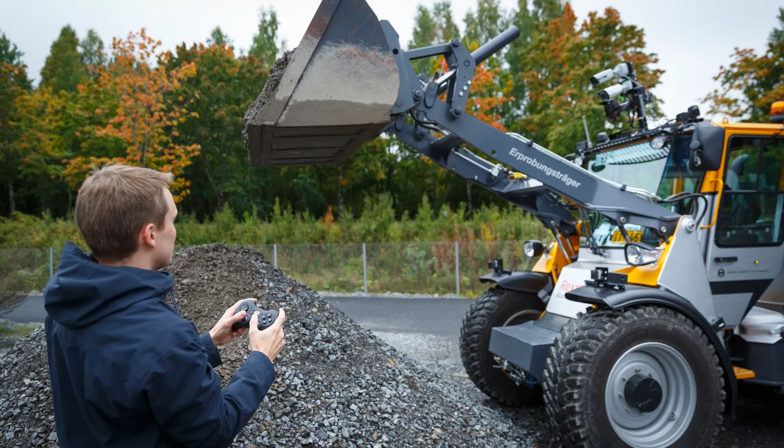Is that on? Now, yes.

Okay. I'm researcher number 2 in the MORE project. I joined the MORE project in March 2021 and I worked at Karlsruhe Institute of Technology under the supervision of Professor Markus Geimer for 6 months, and after that I moved to Finland to work in Novatron company with Antti. And now I'm currently working in Liebherr company in Austria.

For today I prepared a brief presentation. The topic is work performance evaluation of mobile machines. There are several research questions that we would like to answer. Why does the productivity matter so much? Who can get benefit from the productivity? What is the productivity? There is an important sentence: if you cannot measure something, you cannot improve it. This is so necessary for the improvement of the technology in that field.

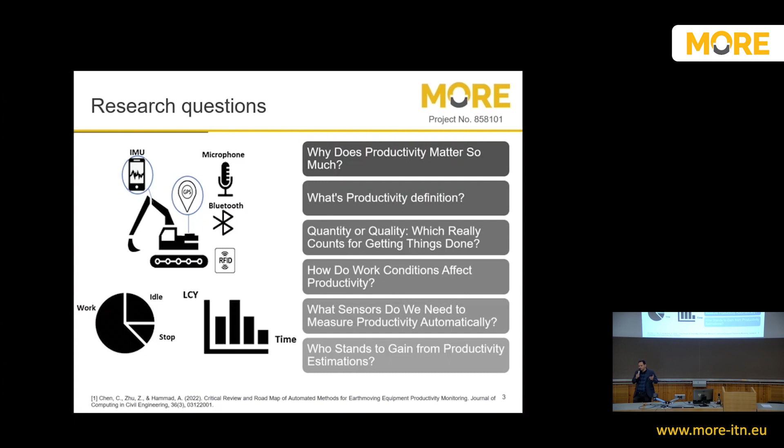And what operating condition can affect the productivity: the swing angle, digging depth, the weather condition, skill of the human operator; all of these parameters can affect the productivity of the machine. By which sensor can we calculate the productivity? Vision sensors such as LiDAR, or maybe motion sensors using inertial measurement units or GNSS. And who can get a benefit from the productivity? A manager or a contractor, or maybe the operator inside the machine.

But for trenching and grading, this definition does not work anymore. When the managers talk about the trenching operation, they say the linear length of the trench per time, or for grading it is the graded area per time. And in this operation, the accuracy or quality of the task is important. So, because of that, we developed a method for automatic task recognition. Firstly, we want to find out what is the current task of the machine.

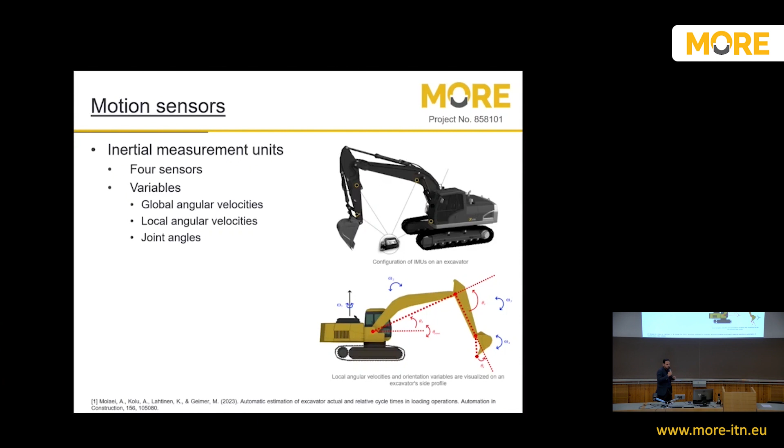The next step is the data collection. We did a lot of experiments to collect enough data in different weather conditions during 1.5 years using our machine in Novatron, a Komatsu excavator. The swing angle in the operation was between 60 and 120 degrees. We used different types of material, sand and gravel, and 2 operators did the operation: me as an inexperienced operator, and one of our colleagues in Novatron as a very, very experienced operator.

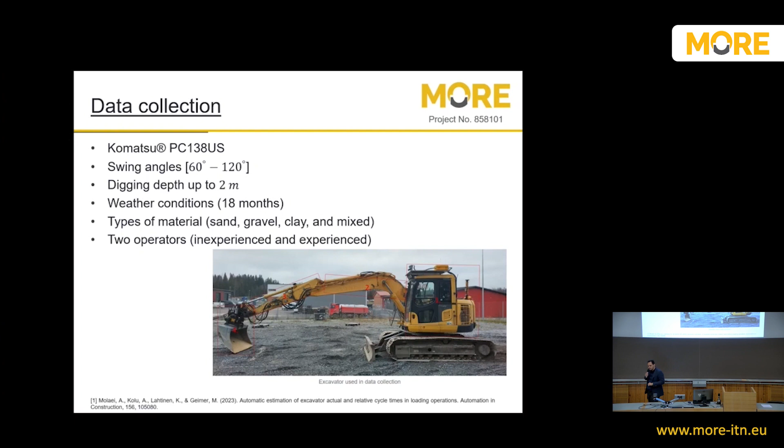The next step is the data processing. We decided to identify the task of the machine based on the time window. We implemented different sizes for the time window, 10 to 20 seconds, and the overlap between two consecutive time windows can be between 0 and 75%. For the data annotation or ground truth, we used another camera installed on the machine, and the most frequent label in each window is chosen as the label of that window. We have 4 different labels for the task: loading, trenching, grading, and idling.

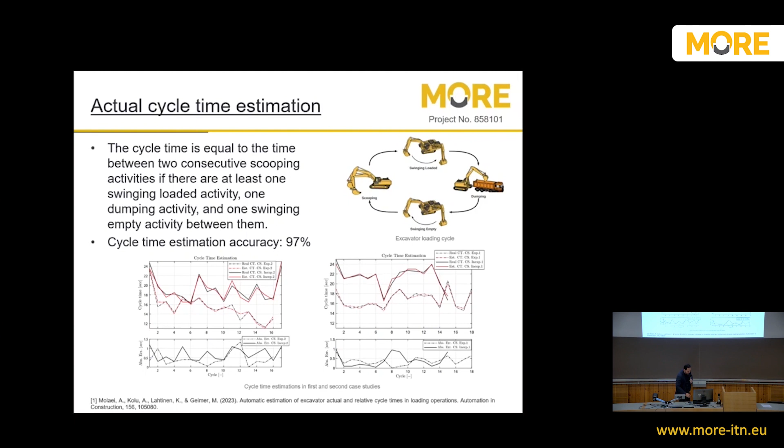Now you can see the result of our method. We can achieve an accuracy of 97% for the cycle time estimation. The error between the ground truth and our estimation is less than 1.5 seconds for the cycle time of the excavator in the loading operation. But this part,

For the theoretical productivity estimation, we need to know what is the current condition in the work site. For this operation, what is the swing angle, what is the digging depth, or maybe what is the material that the excavator is working on, or maybe the size of the excavator. We developed two methods for the swing angle and digging depth estimation. The previous method we presented in the previous events,

but now we are trying to estimate the swing angle using the subtask identification. Actually, the swing angle is the absolute deviation between the scooping and dumping position. How can we calculate the scooping and dumping position by using the subtask identification? Actually, the scooping position is the average of the cabin encoder measurement in the scooping subtask, and for the dumping it is the same. By using the absolute deviation of the scooping and dumping position, we can calculate the swing angle.

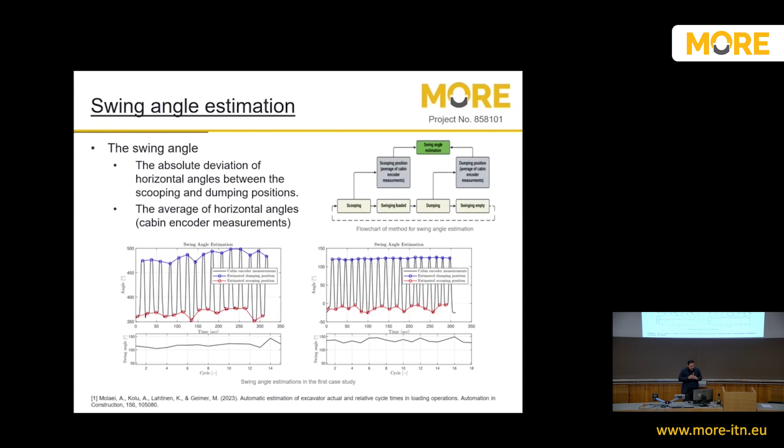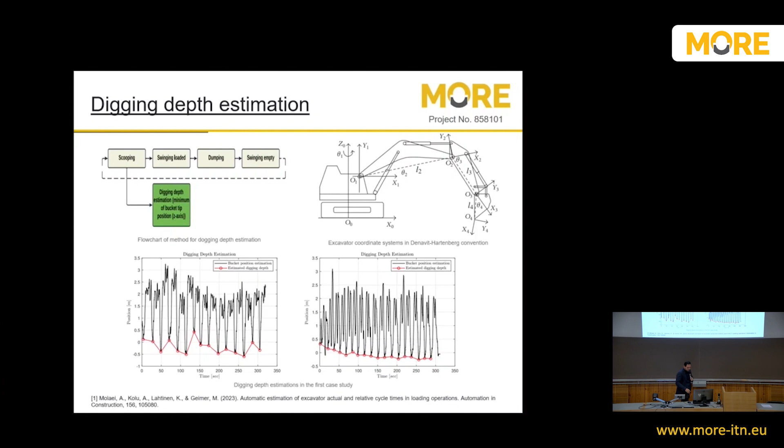Okay, here we are trying to estimate what is the theoretical productivity or theoretical cycle time of the machine. We did some research, and there are some limited methods for the theoretical productivity of the machine from some big companies such as Komatsu and Caterpillar. And we cannot use the model from Caterpillar because it's a descriptive model and it needs human decision. But we implemented the Komatsu and BML method in an automatic manner.

The BML guideline is a German handbook that tries to provide some models for the theoretical productivity of this kind of machine. And our results show the Komatsu model is more optimistic, but the BML guideline is more realistic, and we decided to use the BML guideline. We need 4 inputs for this model: the swing angle that we estimated, the digging depth we estimated, and also the bucket capacity, which we can suppose we know.

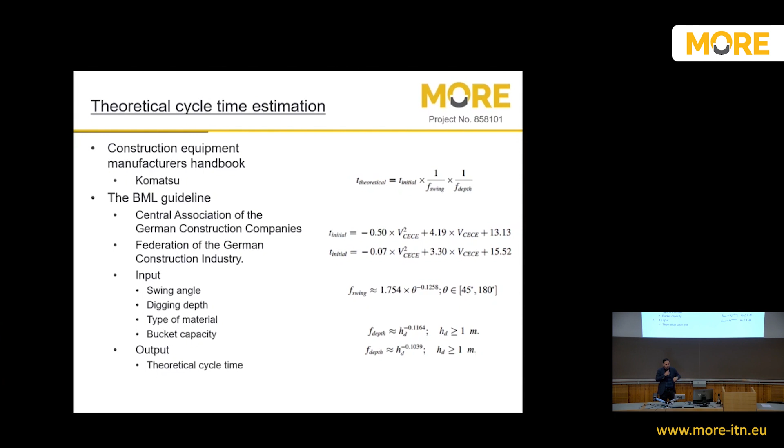But for the type of the material, for this research we suppose we already know it, but maybe in the future we can run some algorithm for automatic material classification, because the type of the material plays an important role in the productivity of the machine. By using this mathematical formula, we can estimate the cycle time of the machine.

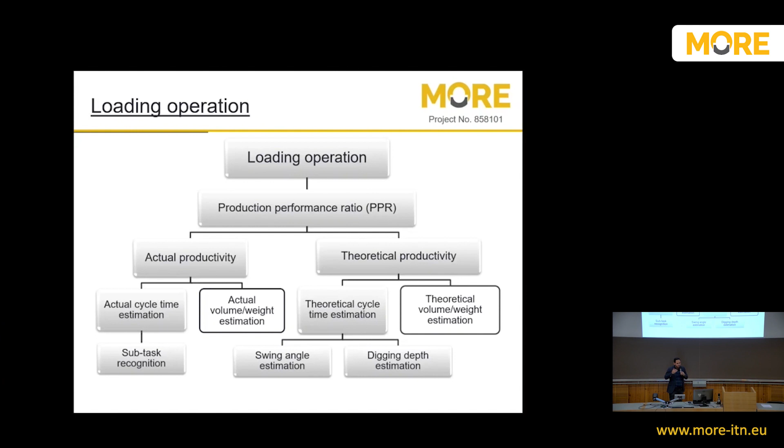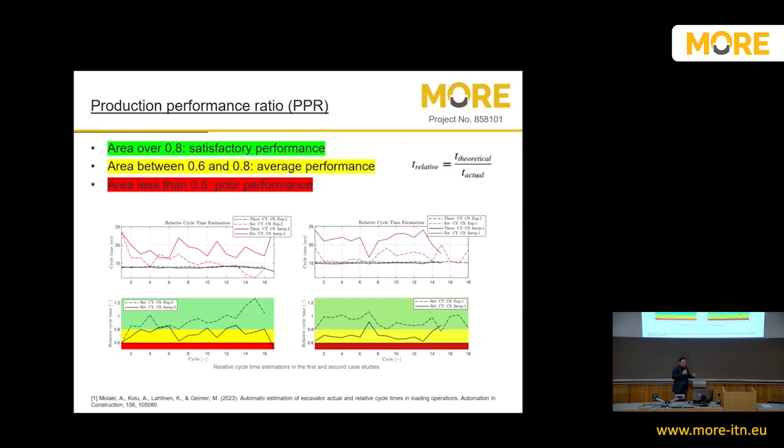That was our idea for the productivity estimation of the excavator in the loading operation. But definitely this definition doesn't work anymore for the other tasks. For the trenching operation, we tried to implement a similar structure. There are some problems, but I think finally we can implement this algorithm.

For the actual productivity, we want to calculate the length of the trench per time. But who provides for us the desired model, or how can we see the surrounding of the excavator to check what is the productivity, or how can we compare the desired model with the actual terrain in the work site?

To see what is the current condition of the work site, we need a 3D vision sensor. In Novatron, we implement the algorithm by using the LiDAR sensor on top of the machine and IMUs and GNSS to develop a grid-based height map, 2.5D map, to model the working area of the excavator in the surrounding area. I don't want to talk in detail about this algorithm, but we have some challenges for the transformation of the data from sensor frame to the machine frame, and after that machine frame to the global frame.

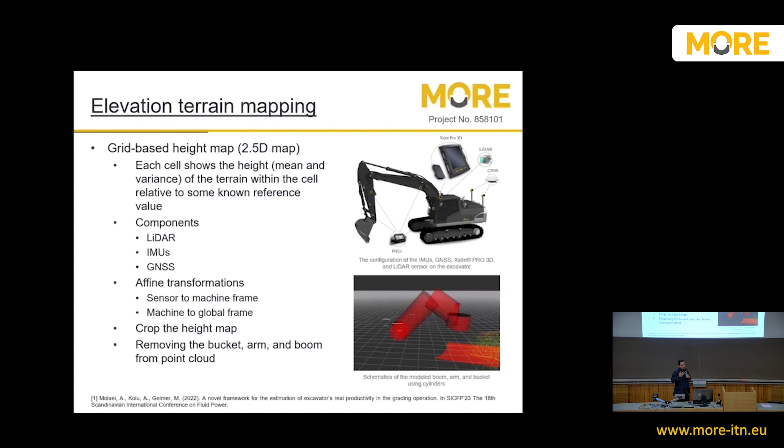And also because the LiDAR sensor is on top of the machine, we always have some extra points from the movement of the manipulator of the machine. We estimate the position of the manipulator of the machine, and we try to remove those points from the point clouds. This step provides what is actually happening in the work site.

But about the desired model, Antti talks a lot about BIM, or building information modeling. This model can give us a lot of information about the target model in the work site. In Novatron, we installed the Xsite PRO 3D system in the cabin of the machine. By using this hardware, the operator can always compare the bucket tip position to the target model and do the operation.

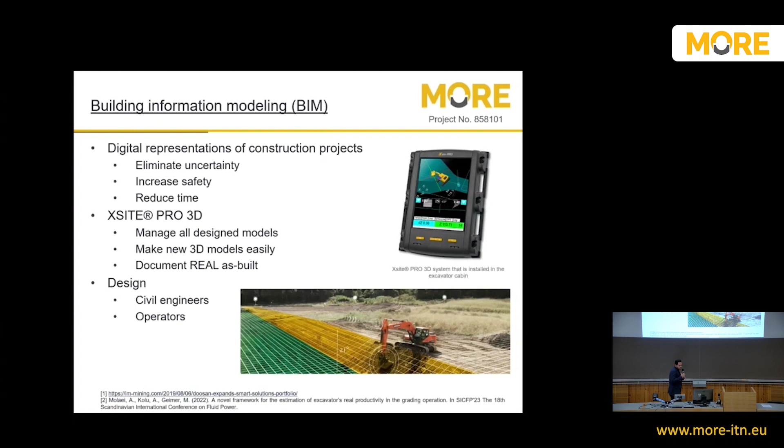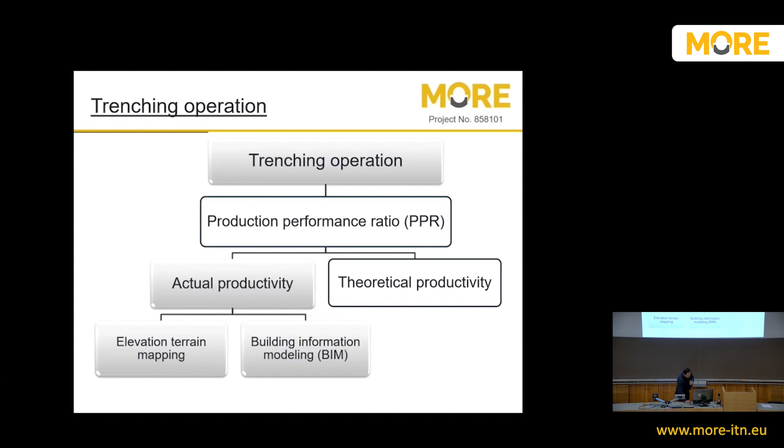How much time? Okay. I will handle it. Okay.

Now we can calculate the productivity estimation. What was the definition? Linear length of the trench per time. We consider a region of interest. Actually, it is a narrow stripe of the trench. And we can always compare the elevation of this stripe to the desired model. When the error, the difference between the target and the actual one, is reduced to a value less than the required accuracy, it means positive productivity.

But sometimes some materials fall into the trench, or the operator is not good at the operation and goes too deep; it means negative productivity. And as you can see, the result of the method here is the aggregate productivity.

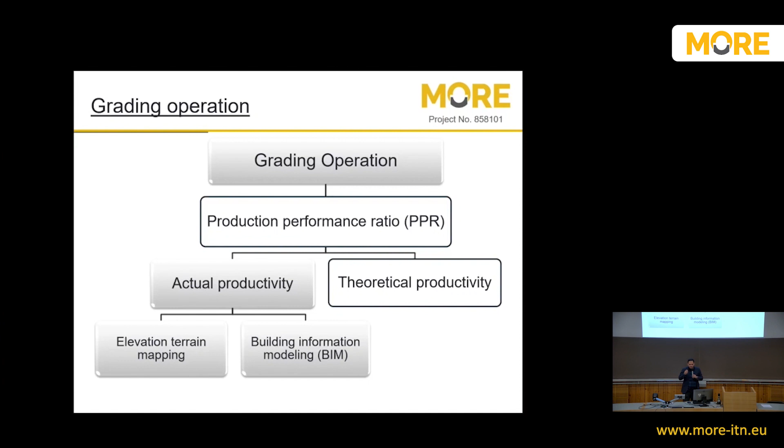For the grading operation, we try to implement a similar idea, but the definition of the productivity is different. Now the region of interest is a square, and we always compare the elevation of this square with what is in the work site. If the error becomes less than the threshold or the required accuracy, it means positive productivity, and if it goes higher than the required accuracy, it means negative productivity.

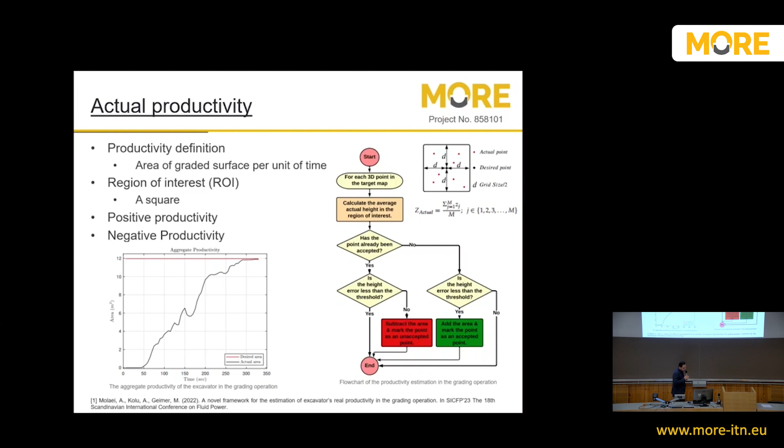That is our last slide. In this project, we try to propose a method for the productivity estimation of the excavator in the 3 most important tasks: loading operation, trenching, and grading operation. We had some problems with the theoretical model for the theoretical productivity estimation of the excavator in the grading and trenching operation, and until now we were not able to calculate the production performance ratio. We are thinking about implementing some similar methods that we did for the loading operation for the wheel loader. Hopefully, we can implement that.

Thank you so much. That was my presentation. I'm happy to answer questions. Any questions? We went over our coffee time.

Okay. You said in the subtask recognition you had an accuracy of 95%. So is this good? What would you say, is this good enough? Yes, I think it is good enough because our main target is the cycle time estimation. In the cycle time estimation, we were able to achieve an accuracy of 97%, and the error most of the time is less than 1 second. In the work site, an error for the cycle time of less than 1 second is enough.